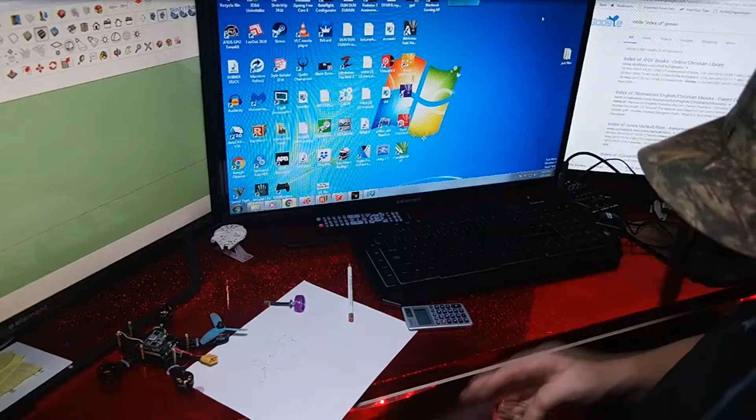So the first few things you need to get: you're going to need a set of dial calipers. I like these little digital ones. You can get whatever you want, you can pick these up at Harbor Freight. They're great. Always make sure that you're zeroing your part. You can work off inches or millimeters, either way you want to go.

If you want to know how we come up with some stuff, first off you need to get a few measurements to start your drawing. I'm using Google SketchUp here, and I'm going to show you how we got this information. So I get a little piece of paper, and we've got a couple dowels here, and we've taken a few measurements.

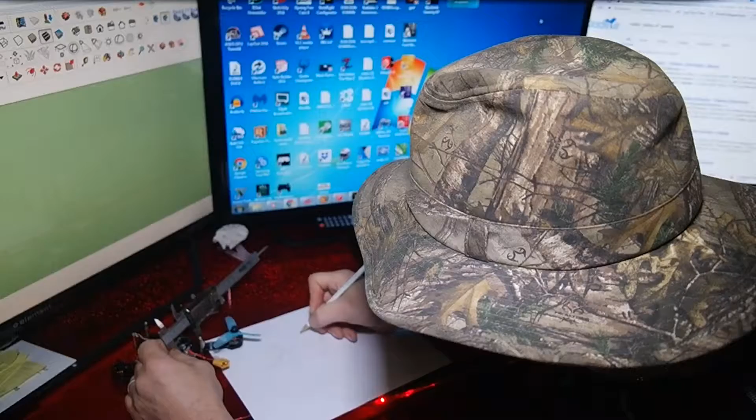Make sure my calipers are at 0. Now I measure at the base of these things to make sure I'm getting what it needs. So it looks like 144, I had wrote 145 - so 1 inch, 0.44. What you're going to do is measure the inside of this, measure the outside, and then measure one of these posts. To be able to figure out where center is on these things, you want to know where your center post is. All you need is this one measurement to be able to go from there.

Now I do have outside dimensions, inside dimensions, and post size. So if you can see here, I've got 145 here. Let's double check, I always double check my measurements. So let's check again here. Make sure it's all 0. I'm measuring at that base - yeah, 144 there.

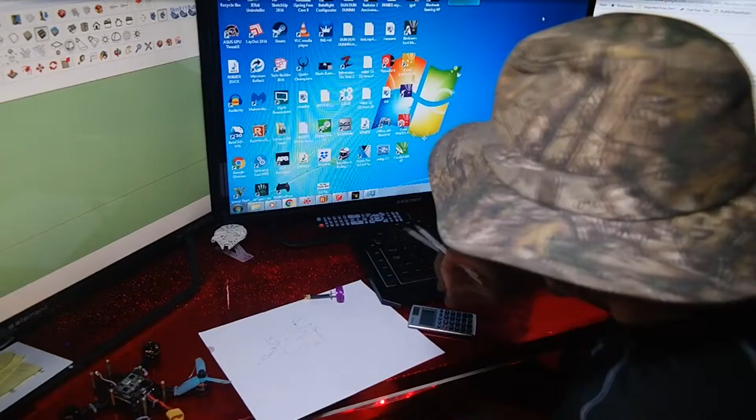And 105 there. If I want to know where center is between all this, basically what you need is two numbers - most of the time it's the inside number. So I want the inside measurement between these two posts, and our outer dimension. I'm going to take this inside measurement, 1.05, and then I'm just going to add one post - not two, but one, because that's going to be divided between two. Keep in mind, when you divide that, that gives you your center post measurement. So I add 0.20, and it's going to tell me that from center to center of these posts is 1.25 inches between the center of each post.

And now we're going to take it to the drawing. You also want to get a few other measurements - you want to know the height of this build. So you can take the end of your calipers and put it right here, and you can get a measurement. That looks like about 0.77. We don't need it exact, though you can get it really, really close.

Let's just say, for example, our post height - we'll give it a little bit of play because 3D printing is not 100% right on the dot. Let's just say the height on this thing is 0.75, we're going to give this a little bit of movement to compensate. Now, this measurement on this post that we took, I know it says 0.199, but when I 3D print it, I'm going to print that at say 0.21.

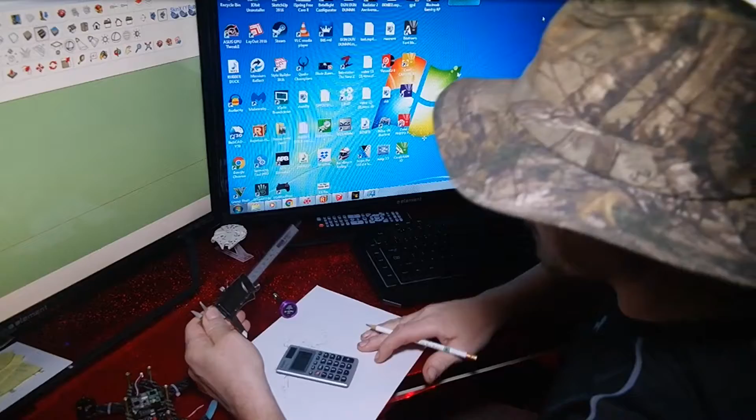So here's the few measurements we're going to need: our center point measurement, which is 1.25, our post dimension which was going to be just say 0.21, and our height would be 0.75. That's kind of where I start off - I start with a scratch piece of paper.

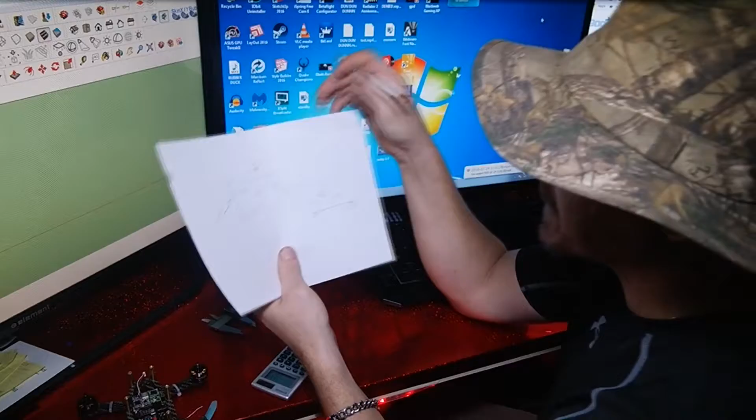I know this looks like a crazy, sloppy sketch. You got to work with what you can do - don't worry about what everybody else does. If you can understand your own language, then go for it. But get yourself a piece of paper and sketch this stuff out. So we got a couple base measurements.

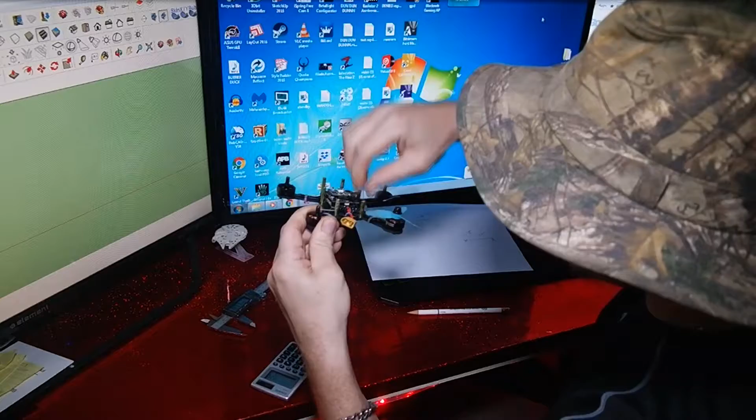Now, what you want to think about when you get ready to print: I'm going to build a sleeve that's going to go over this, sliding over the top of it with a bracket in the middle. I want to think about how thick I want this to go all the way around. You want to make sure you've got plenty of space - I'm just eyeballing it, I want it strong enough that it's not going to blow out. Remember, that's going to be the thickness of your wall, so let's just say 0.30.

0.30 on our height, on our post size. Draw a circle - you know what that was right here. This was, say, 0.20, just roughing it around, or say 0.21. Something in that range - you want a little bit of giveaway. Let's just go, for example, 0.21. We're going to give a little bit so that can slide over top of this.

Now there's going to be another circle on the outside, and that circle on the outside is going to be 0.30. Okay? Then with some quick math, you can know how thick that outside wall is.

So we're going to step right into Google SketchUp right here, and we're going to start drawing this. I'm going to show you how we draw these parts. We'll get right onto it.

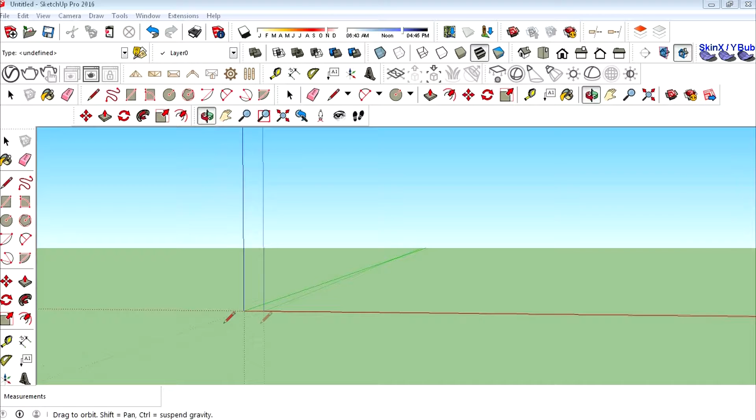Alrighty, now that we're in SketchUp, we need to set up a few things in here. We're going to go to Model Info, and I'm going to work off decimal in this drawing. And we're going to start off on our center section of our drawing. This is where the SMA connector is going to go.

I'm going to stretch a line up here to a height of 0.74. Remember, our total height of our column was 0.75. I'm giving a little bit of leeway here - a 3D printer is not exactly precise measurements. They get them close, but not perfect.

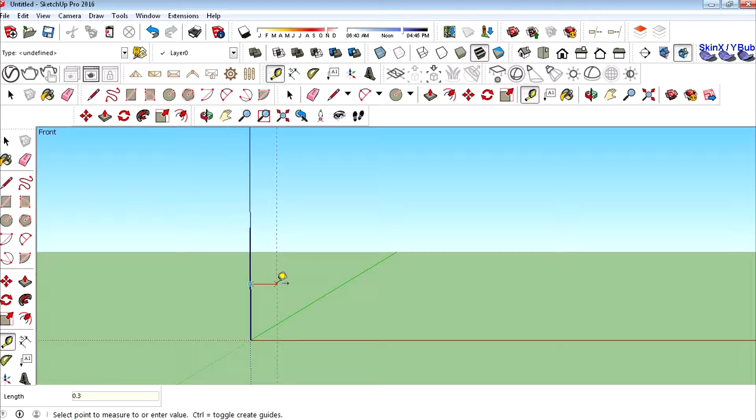We're going to grab our reference line, and we're going to give a little bit of thickness. And this thickness is going to be a little bit thicker than our post dimension, so we can kind of wrap our part around that, our center columns. In a few minutes, you're going to see that.

Go ahead and box in your part. Once you get it all boxed in, it should turn gray. There we go. Now, grab your reference lines, and we're going to come off the top and bottom.

And here in a few minutes, you're going to see this diagonal design that we're going to put in here. This is going to create the angle for the antenna to come. Instead of coming straight out the backside, it's going to come out at a certain decent grade. I haven't figured out a good grade of it yet, but I want a decent little angle to it.

And now at this point, we're just going to throw in some lines, just connect the dots. Now you want to box this in - this is going to be the top flat of it and the bottom flat of it.

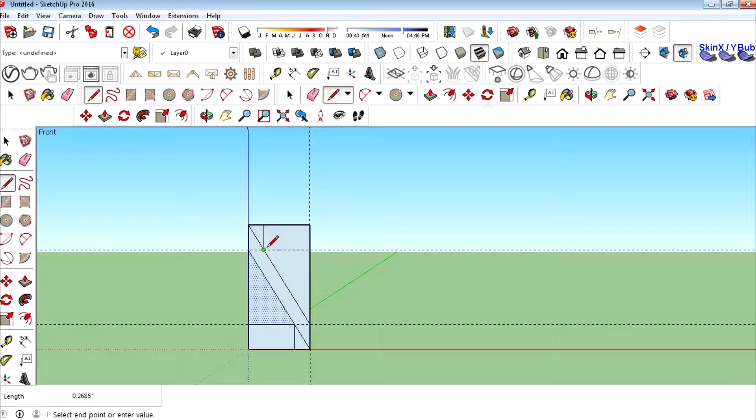Now you want to start to - let's see here. I'm just kind of sketching around, just going to see how this feels. I'm not for sure where I'm going to go with this. We'll take out a few lines in here. We're going to go ahead and delete out some of this. And remember, if it doesn't always work out for you, you can always back up and redo it.

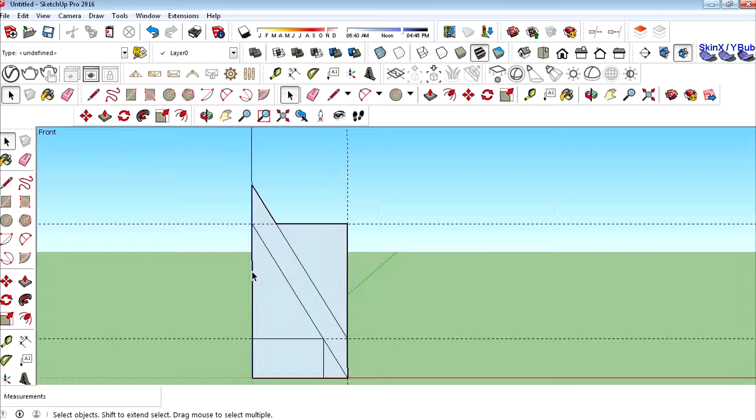I'm just playing around here at this point - you don't have to be precise. Delete out a few things. Delete out. Getting there. Alrighty, wait a minute - this ain't right. I deleted a few things there that we shouldn't have deleted out.

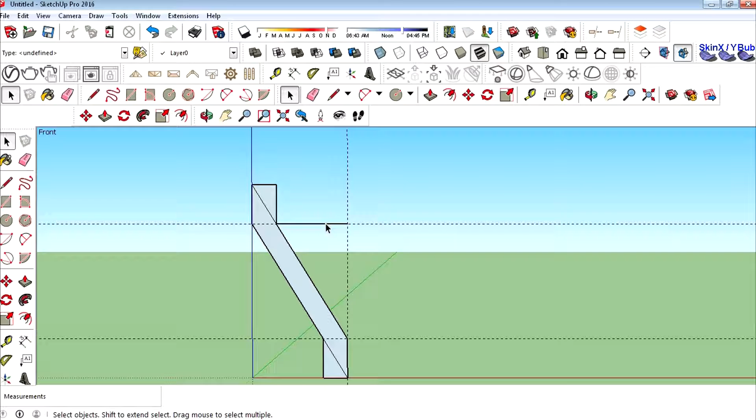Alright, go ahead and delete that out. I didn't need that line, didn't need this, and we're going to get out the rest of this. We want this zigzag kind of pattern for our build. Delete the inner fills of those, and now you can see we have that cool little zigzag kind of shape.

Get rid of our reference lines, kind of orbit around here, let's take a look at the part. That looks really well - this is going to work. It's going to create a significant amount of angle for my antenna to stick out the back of the quad.

Now, in this section of the build, we're going to start off with our post. I'm going to lay down a line measurement of center to center of the post, exactly center of the post. And that measurement ended up being at 1.25 inches. So let's stretch our line out here and enter 1.25.

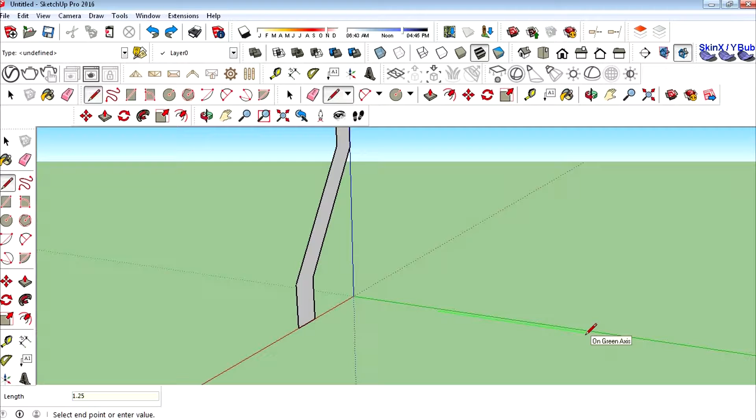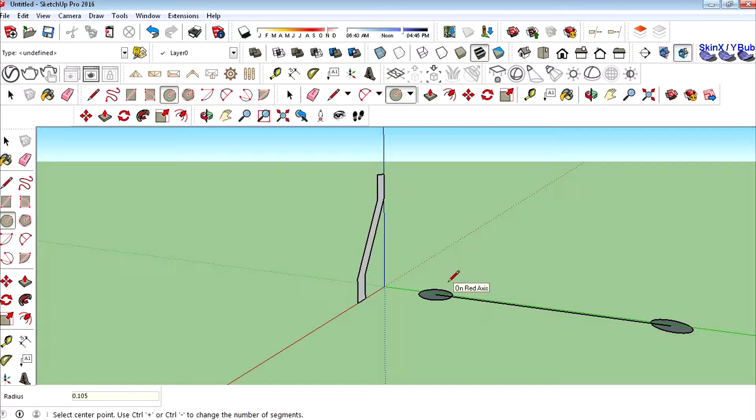There we go, and we're going to start putting in our post. Now we're going to put that very, right there on the edge, and that's going to be center of those posts. Okay, come on, stretch it out. There we go. We're going to enter our measurements of 0.105, and the same thing over here, 0.105. Now, that 0.105 is not the exact thickness of your post.

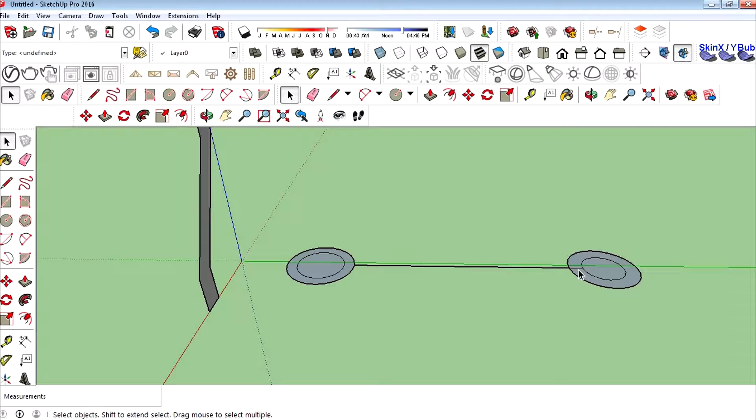That it's all multiplied out, and it's going to change the value when you're reading it with the dial calipers. So again, 0.15, if you added those together, that'd be 0.30. That's kind of the thickness I was going for there, and you want a little bit of meat on it. If you don't quite get what you want for thickness, grab your dial calipers, hold them up to your eye and look through it, and say, yeah, that's good enough meat.

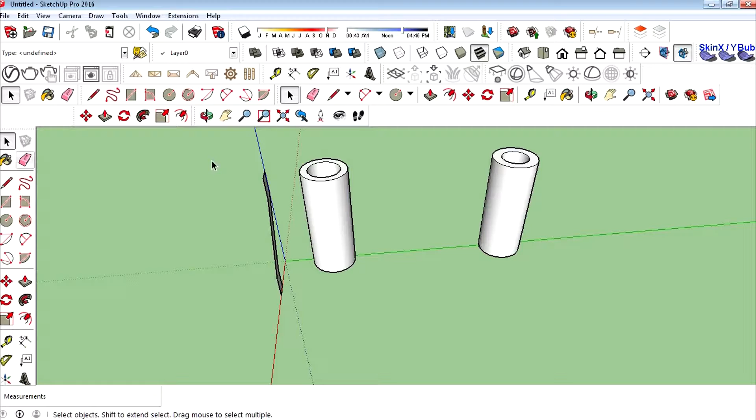Then we're going to stretch this column up to 0.14. Grab the other one and match it the same. Now we have two posts that are directly spaced out. It was that simple. Now you want to grab your center cut section of your drawing, stretch that in there, and see how it fits. You might want to stretch it out a little bit more. Give it a little shape.

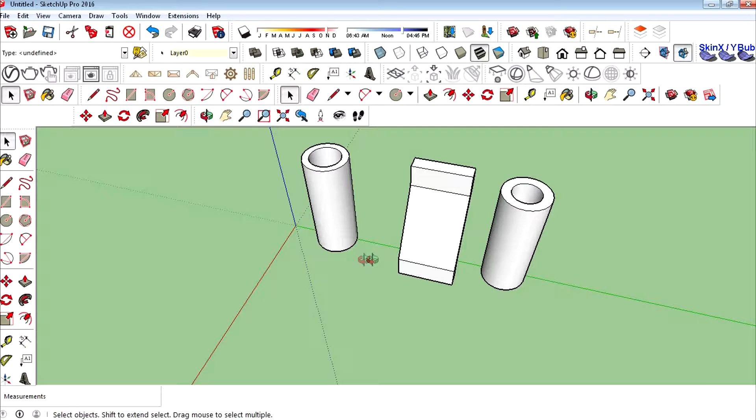And we're going to connect these to the columns. What I was going to tell you is how we're going to wrap these things around it. I'll show you a little trick how to do this. We're going to highlight the part and butt it up to our post. There we go. You want to look down the center of your column and make sure that you're not protruding through the center of it.

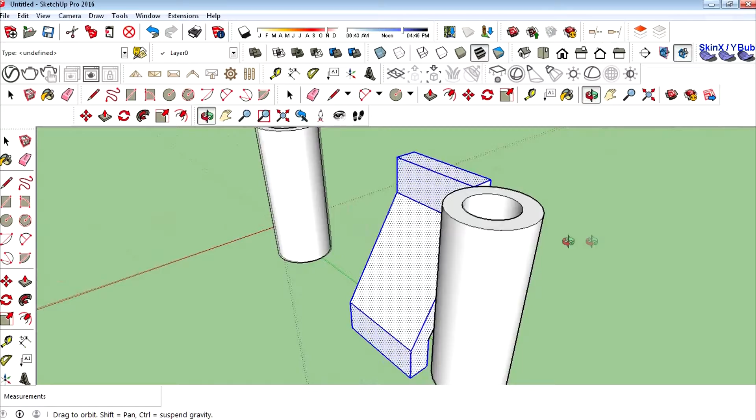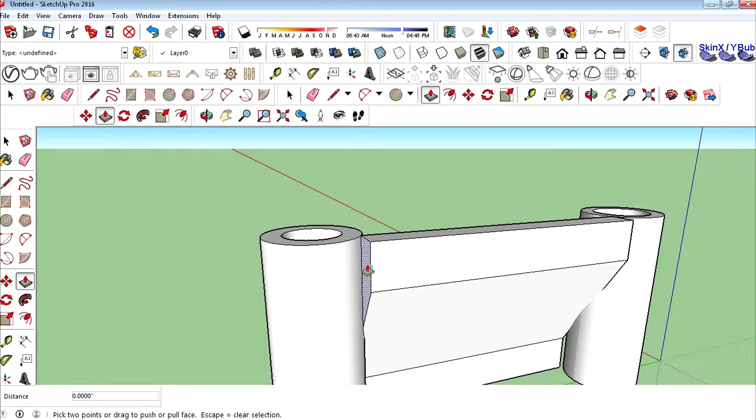There's a little trick here to wrap these edges around so that this thing can connect. If you don't, it'll just fall right apart when you do a 3D print. We're going to connect it to the face side over there as well. Now here comes our little trick: grab your pointer tool, click on the face side of the column, and intersect with model. What that does is connect all the lines inside there. We're going to two-step this thing kind of around the column, and that's going to keep it from moving the entire part all the way through your drawing.

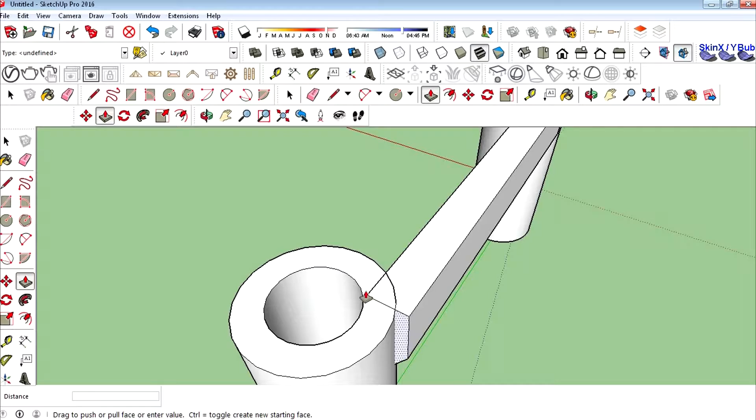Alright, let's grab the push-pull tool again. Click on it again. There we go, we're going to pull it up here. Look down the center of the bore, make sure that's clearing, which it is. And again, intersect with the model - you may have to do this several times. And that's our little two-step, we kind of stepped around the edge of that.

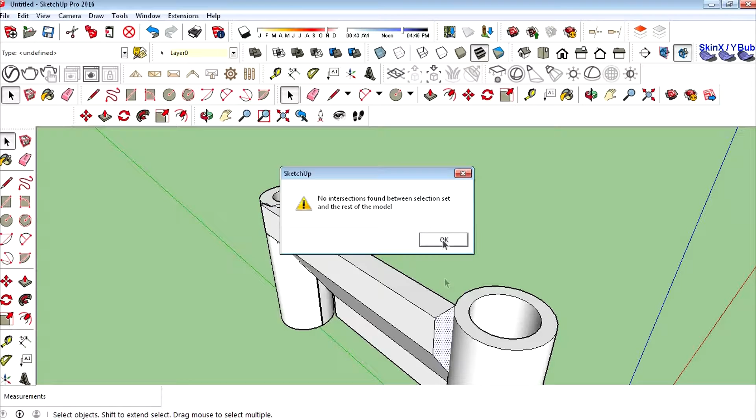And do the same thing over here: intersect with the model, and then we're going to stretch a bit of that sidewall around the column. I'll stretch it up, not quite all the way through, and do it again - intersect with model, and stretch it around again. Now we're getting some meat around that part. This will surely hold together.

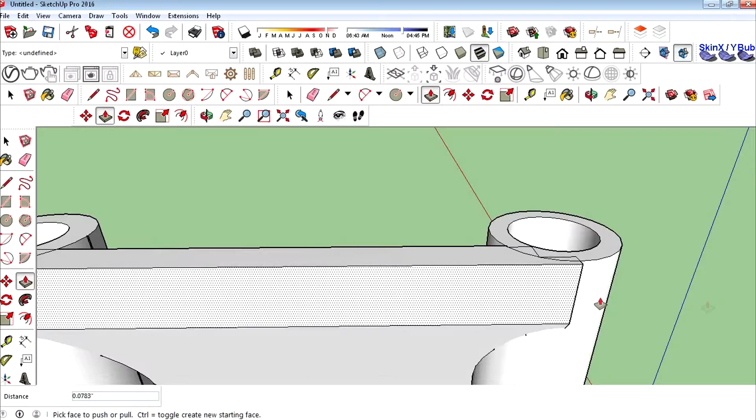When you do the 3D printing - 3D printing is really funny, it will understand hollowness and voids and think that's got to be in there. So when you do your drawings and you want that all to be kind of buttery smooth, you don't want to have all that in there. Looks like we got rid of a line there.

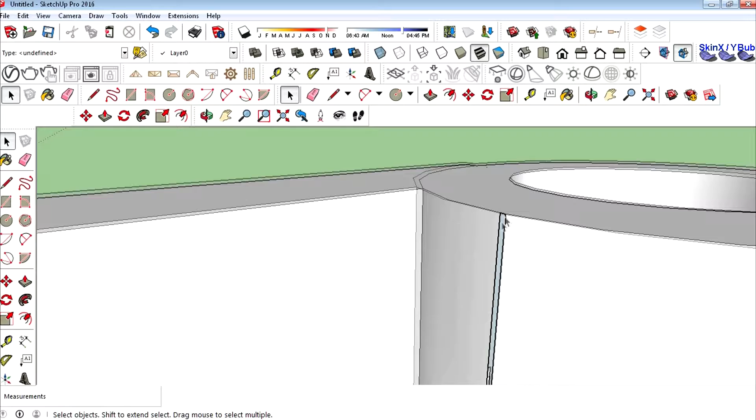Okay, let's go ahead and grab our line tool and fill it in. There we go, we just basically intersected with the model and kept stretching our sidewalls around it till we got a good fit. And we're going to go ahead and delete out these excess lines, like I told you - if you don't, when you 3D print, it will absolutely think it's got to be part of it, and it'll just separate.

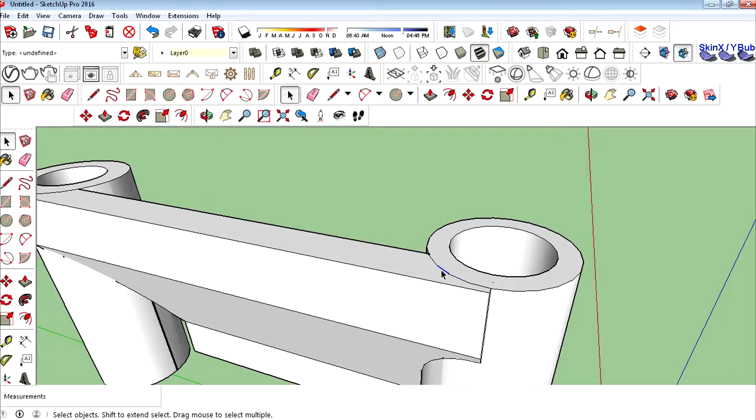Oop, looks like we didn't intersect with the model. Again, intersect faces with the model, and go ahead and delete those out. What that does is finish a lot of line segments that you didn't connect, or connects those two segments together, and then you can continue stretching it around. I'll go ahead and delete out what we can in there.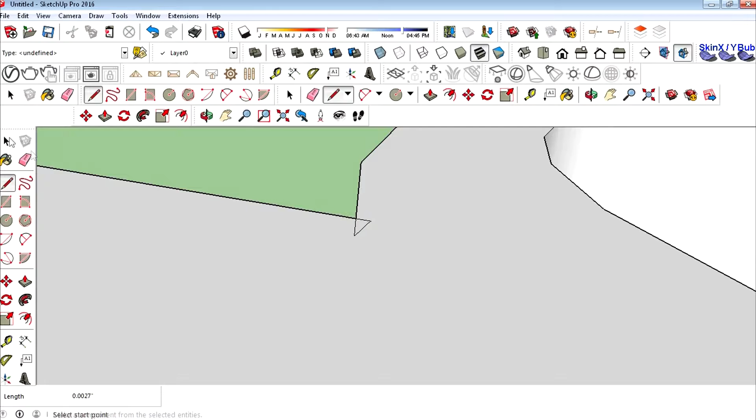Looks like we got a little void there. Go ahead and stretch that in there, and then delete those lines out. If you think you've got a bunch of line segments on the inside of your part, you can always go into an X-ray mode and clean that up. There we go, that looks pretty good. Alright, a little bit over here.

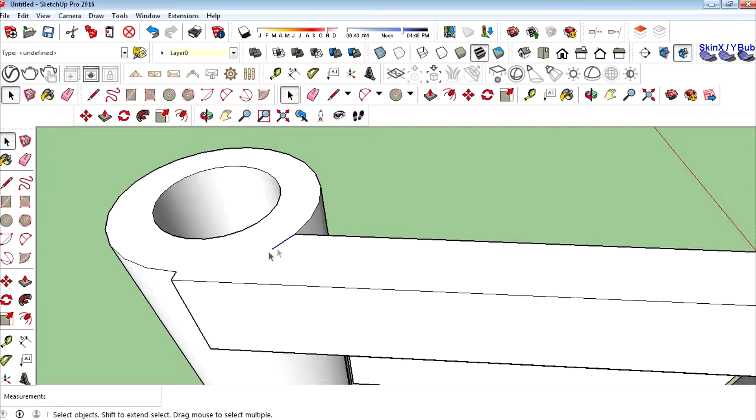Okay, kind of zoom in there, let's go ahead and click on these. Oh, we didn't intersect it with the face again. Click on the face side of it and intersect with the model. Delete, delete, delete, delete, and delete. We're cleaning it up, making it as smooth as we can.

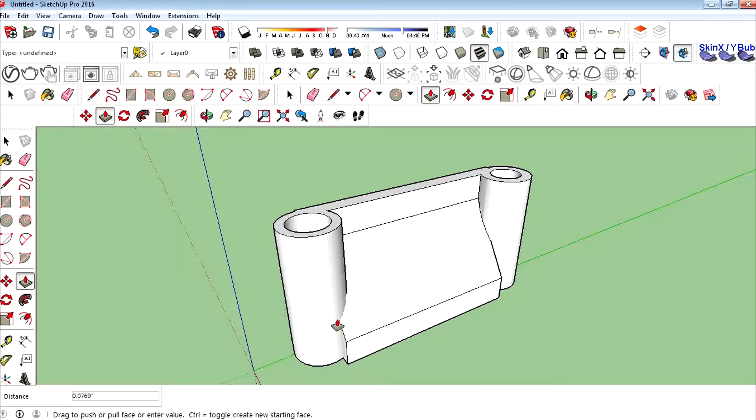We got a little bit more work down here at the bottom. And again, intersect with the model - it appears to be already done. We're going to stretch it around a little bit. That looks pretty good, yeah, that looks real good. Ooh, nope, go back - yes, there you go, right there. This thing, it doesn't have to be perfect. Each line... oh my goodness, they did not stay. Back it up - I like those forward and backward buttons, sure does help out.

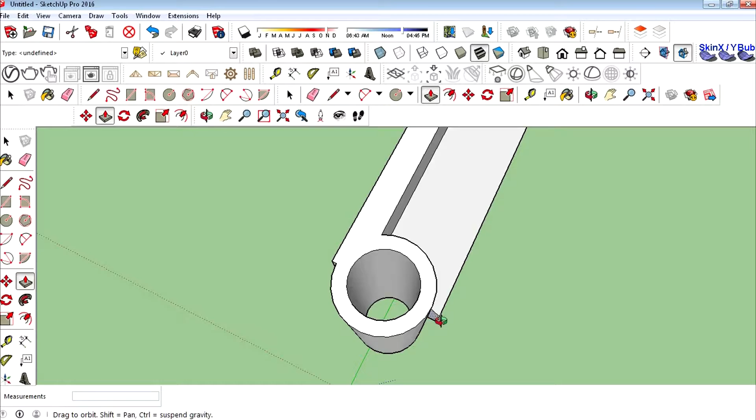Some people want those exact measurements, but since we're 3D printing and this is just a structural part, you don't have to have precise measurements. You just want it to have a form fit, and that's what we're going for. Look right there, that's going to be close enough.

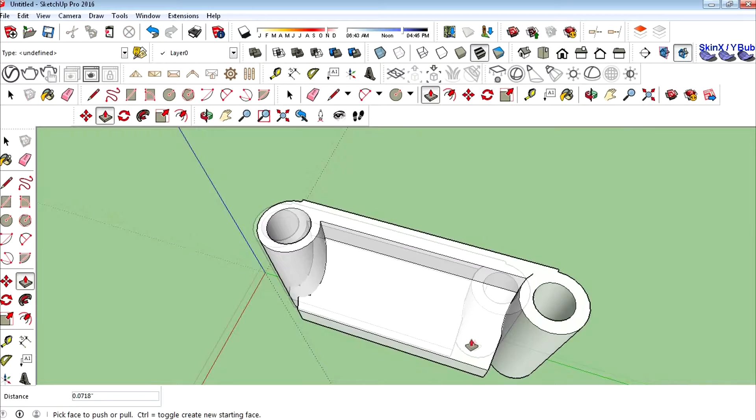Again, we need to intersect with the model, and we can continue stretching it around. That's going to keep that whole part from protruding through to the center of your drawing, or the center of those tubes. Precise - you can see how that's doing it. Do a little bit over here, intersect with the model, and we're going to stretch it around again.

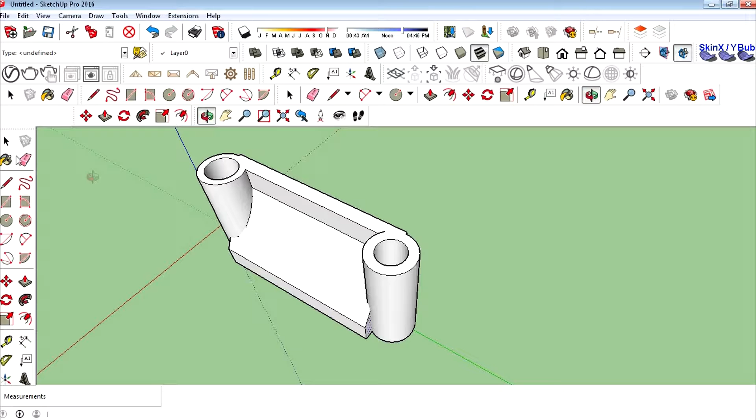This will help, there we go. Getting close, just about there. Yep, getting there, okay, everything's looking really clean. Alright, now we need to... daggone it, a little bit more, fidgety hands today. There we go, close enough.

Alright, now we need to create the mount, or the hole for a SMA connector to go through. Grab your line tools or your reference tools, and what you're going to do is kind of get center of this part. There we go, that looks pretty good. We may have to put a line down the center. There we go, by stretching lines you can always remove them. And we're going to bring the reference tool. Oh, now we have where our center part's at.

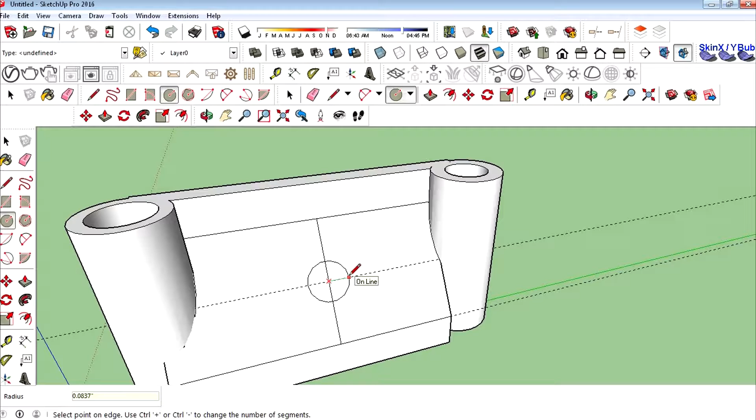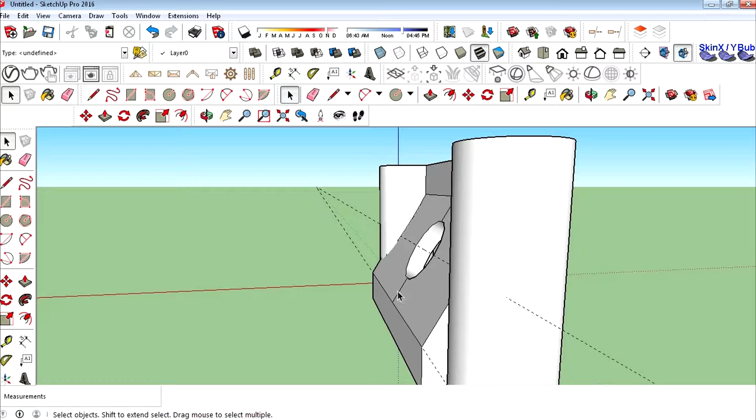And that's it, that looks like we're getting close. Delete a little bit more, keeping that part very fluid. Alright, get rid of our reference lines. And that looks great, that is about what we need. I think we're really close. Absolutely.

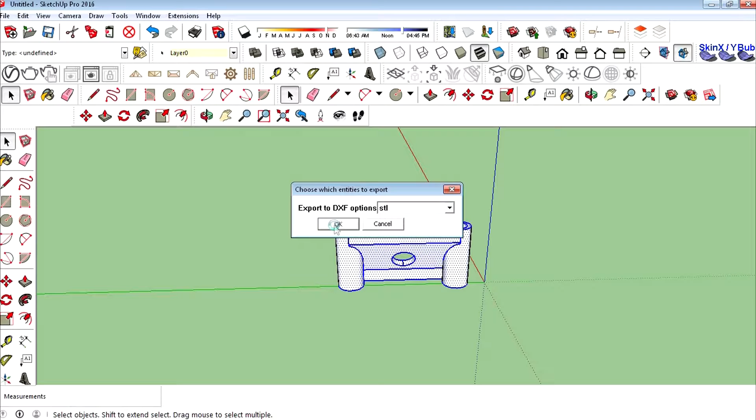We can highlight the part, go to File, and export it to STL. And you get that add-on on DXF, and use STL. Click on OK, and then we're going to save our file. Name it - no, not that. SMA.stl - you might want to write that in there, because when you go back to put it in your printer, it may not accept it. Alright, that's pretty much it.

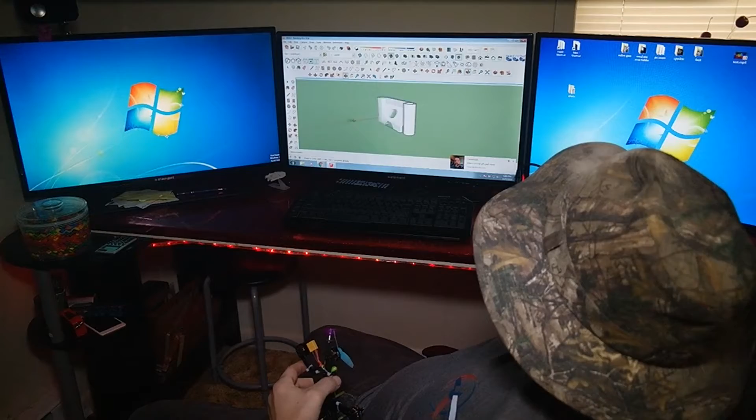I still got our parts kind of setting up here, and I'll kind of scoot out of the way. You can still see our finished part, and that's it. That's all we had to do to this thing.